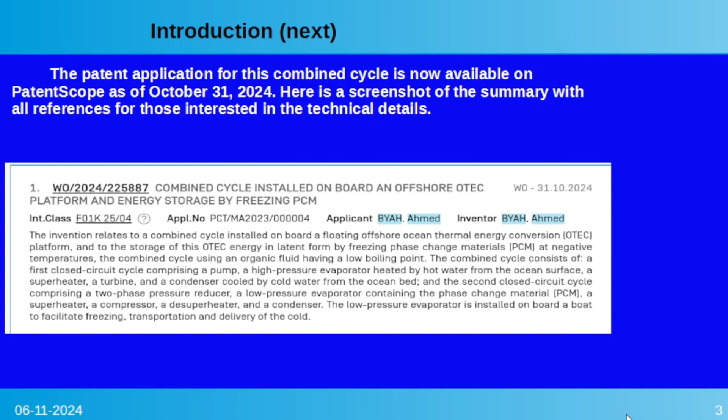Historically, OTEC has been confined to equatorial regions due to the requirement of a temperature difference of 20 degrees Celsius between surface and deep ocean waters. However, with this innovative combined thermodynamic cycle, this technology can now be deployed in any country with maritime access such as Morocco. This combined cycle opens new possibilities for harnessing ocean thermal energy on a global scale, significantly transforming the global energy landscape.

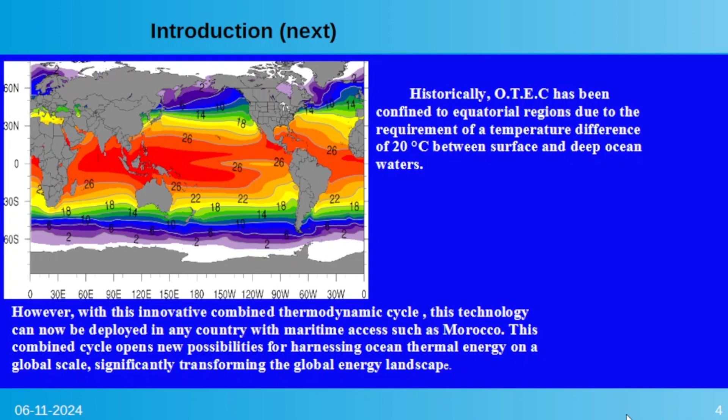The invention of a combined cycle for equipping offshore OTEC installations represents a major technological advancement toward accelerating this technology's deployment. This combined cycle is more efficient than existing cycles, offering more than a 50% improvement in efficiency. To address challenges such as connecting offshore stations to the public grid, managing cold water pumping at coastal stations, and expanding OTEC technology to all countries with maritime access, the invention proposes a two-step approach.

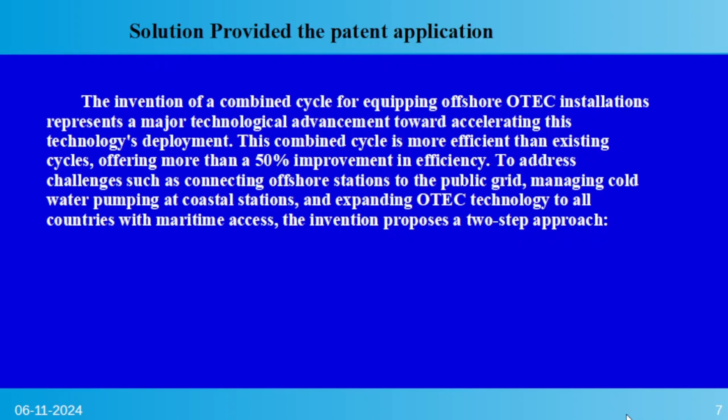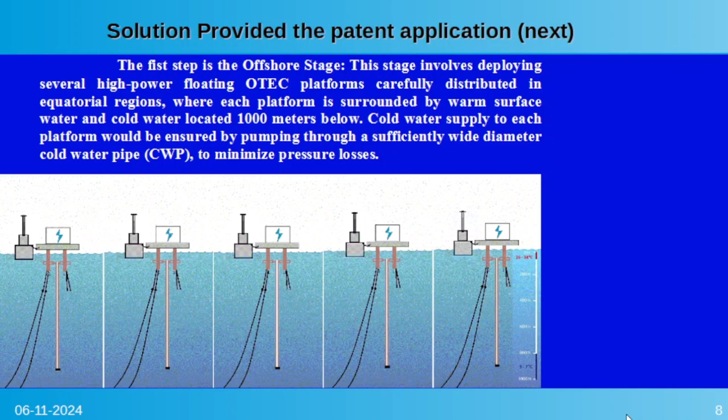The first step is the offshore stage. This stage involves deploying several high-power floating OTEC platforms carefully distributed in equatorial regions, where each platform is surrounded by warm surface water and cold water located 1,000 meters below. Cold water supply to each platform would be ensured by pumping through a sufficiently wide diameter cold water pipe, CWP, to minimize pressure losses. Each platform would be equipped with the necessary devices to meet the combined thermodynamic cycle requirements developed by the invention, which differs from and is more efficient than currently used cycles.

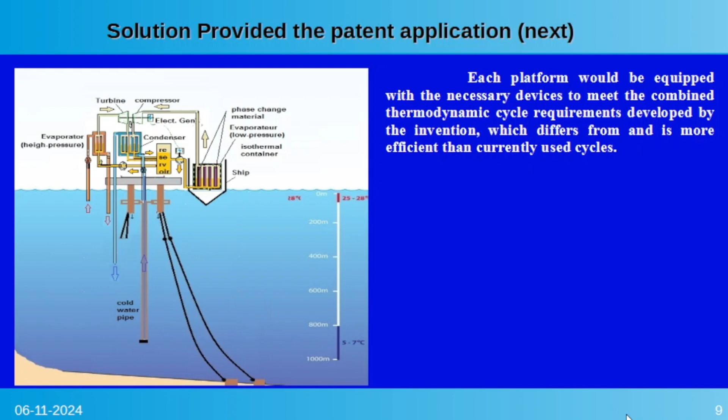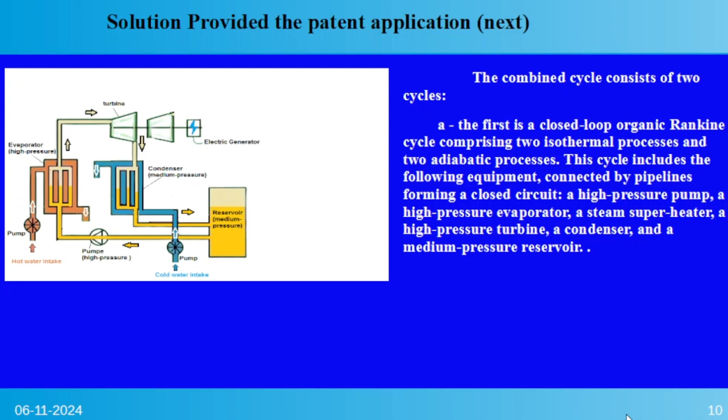The combined cycle consists of two cycles. A. The first is a closed-loop organic Rankine cycle comprising two isothermal processes and two adiabatic processes. This cycle includes the following equipment, connected by pipelines forming a closed circuit: a high-pressure pump, a high-pressure evaporator, a steam superheater, a high-pressure turbine, a condenser, and a medium-pressure reservoir.

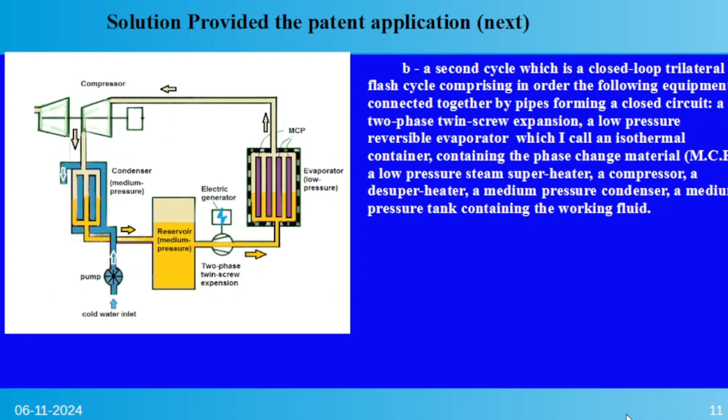B. A second cycle, which is a closed-loop trilateral flash cycle comprising in order the following equipment connected together by pipes forming a closed circuit: a two-phase twin-screw expansion, a low-pressure reversible evaporator which I call an isothermal container, containing the phase change material, MCP, a low-pressure steam superheater, a compressor, a desuperheater, a medium-pressure condenser, and a medium-pressure tank containing the working fluid.

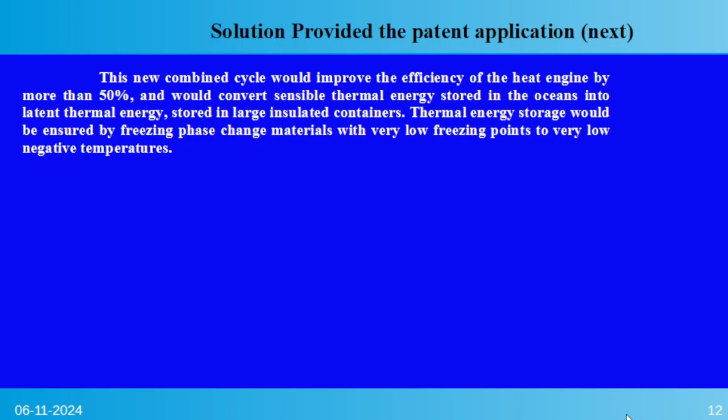This new combined cycle would improve the efficiency of the heat engine by more than 50%, and would convert sensible thermal energy stored in the oceans into latent thermal energy, stored in large insulated containers. Thermal energy storage would be ensured by freezing phase change materials with very low freezing points to very low negative temperatures.

The term insulated container carrier refers to the low-pressure evaporator containing the phase change material to be frozen to store thermal energy in a concentrated manner in the form of latent energy. This insulated container, built and mounted on board a boat or barge, has the particularity of being reversible, which serves as an evaporator and condenser, rechargeable and transportable.

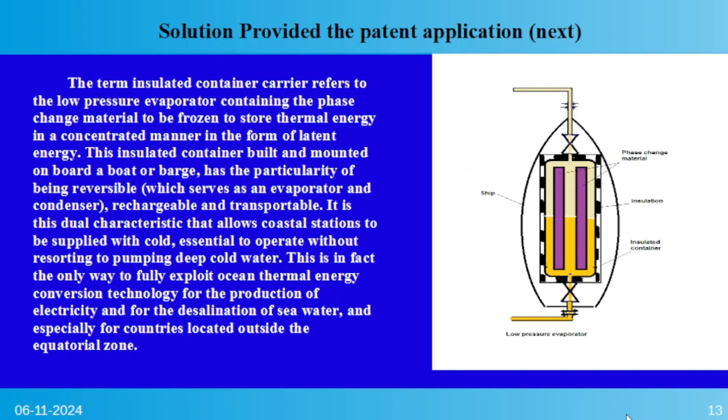It is this dual characteristic that allows coastal stations to be supplied with cold, essential to operate without resorting to pumping deep cold water. This is in fact the only way to fully exploit ocean thermal energy conversion technology for the production of electricity and for the desalination of seawater, and especially for countries located outside the equatorial zone.

The second step is the coastal stage. This stage occurs in coastal OTEC stations, where energy is produced using the isothermal container as the cold source, condenser, and local coastal water as the hot source, evaporator, regardless of its temperature. This coastal stage is not limited to the intertropical zone and can be applied in all countries with maritime access.

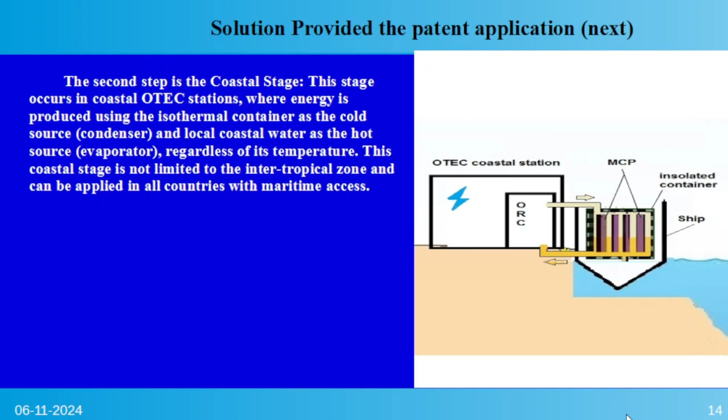Morocco is a country bordered by the Atlantic Ocean and located outside the intertropical zone, with the source of cold deep ocean water located very far from the coast, exceeding 100 kilometers. Morocco has an average annual water temperature along its Atlantic coastline of 19 degrees Celsius, which might suggest that it cannot benefit from OTEC technology.

However, with the combined thermodynamic cycle, Morocco could harness this technology provided that appropriate infrastructure, particularly coastal stations capable of receiving isothermal containers, is established.

In this new configuration, the parameters change. Assuming the freezing temperature of the phase change material is -35 degrees Celsius and the local surface water temperature is 19 degrees Celsius, the temperature difference between the two sources becomes 54 degrees Celsius. This significant increase in temperature difference would greatly enhance the thermal engine's efficiency, raising it to over 18%. This performance is a significant improvement over the previous efficiency, which was less than 2%.

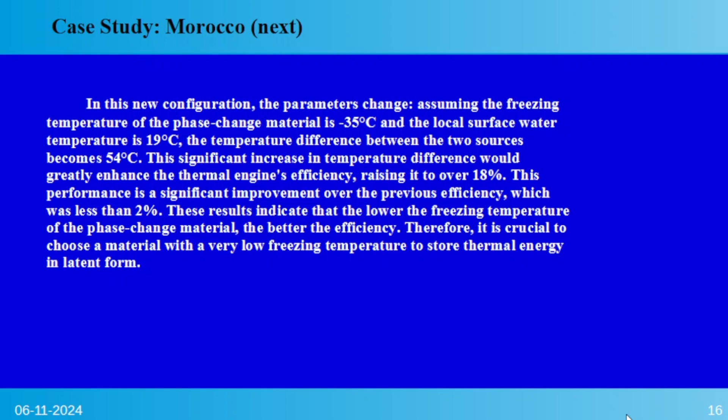These results indicate that the lower the freezing temperature of the phase change material, the better the efficiency. Therefore, it is crucial to choose a material with a very low freezing temperature to store thermal energy in latent form. As previously mentioned, OTEC technology requires a hot and cold source with a minimum temperature difference of 20 degrees Celsius to operate a heat engine coupled to an electric generator.

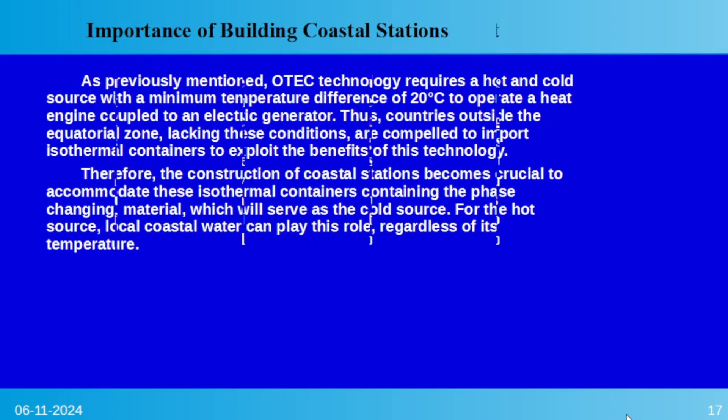Thus, countries outside the equatorial zone, lacking these conditions, are compelled to import isothermal containers to exploit the benefits of this technology. Therefore, the construction of coastal stations becomes crucial to accommodate these isothermal containers containing the phase-changing material, which will serve as the cold source. For the hot source, local coastal water can play this role, regardless of its temperature.

After the complete melting of phase-change materials, a significant amount of sensible energy remains available for use, creating opportunities for economic activities and job creation. Among these activities are desalination of seawater using freezing methods, which produces high-quality water at a low cost, as well as utilizing the residual cold for air conditioning systems, providing a sustainable solution for cooling buildings and infrastructure.

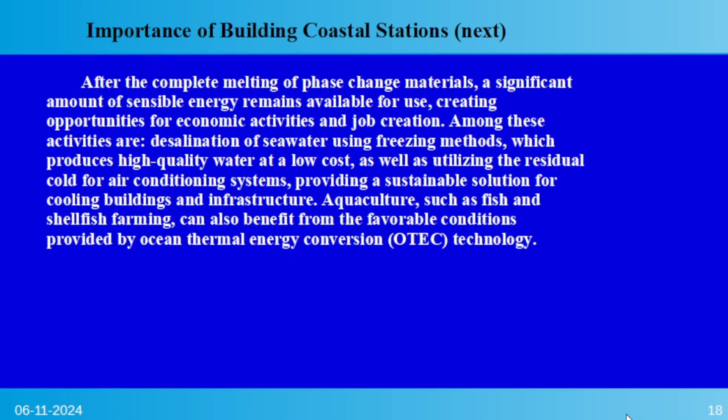Aquaculture, such as fish and shellfish farming, can also benefit from the favorable conditions provided by ocean thermal energy conversion (OTEC) technology. Thanks to the innovative combined thermodynamic cycle, the deployment of ocean thermal energy conversion technology on a global scale is now within reach. This breakthrough opens the door for every coastal nation to tap into a vast, free, renewable, and inexhaustible energy source stored in the warm tropical waters.

By embracing this technology, we can diversify our energy mix, reduce our reliance on fossil fuels, and significantly lower greenhouse gas emissions. Imagine a future where clean, sustainable energy is not only a possibility but a shared reality. With ocean thermal energy conversion, we are one step closer to achieving a resilient and sustainable world for generations to come. Let's make this vision a global commitment.